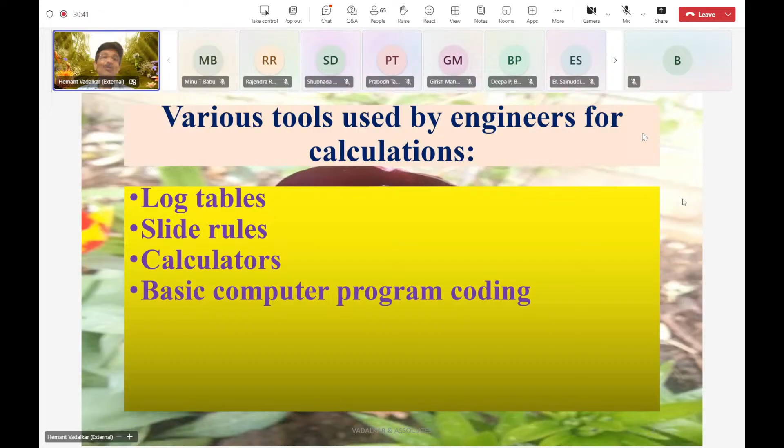So nowadays we got better tools for our computing facilities. Earlier it was very crude facilities that were available, so we used to do some basic calculations by slide rules or by log tables even.

We're getting stuck, one minute. Let me just see.

So there are different programs like spreadsheets nowadays, which are very useful in doing calculations. MATLAB is another good program widely used by engineers. This is again similar to a spreadsheet but much more advanced, with different types of functions available. These are advanced features for doing repetitive calculations.

If you have to do repetitive calculations by changing certain parameters, you just see what is the effect of that parameter, and these are very good tools for that. I would say spreadsheets are still used by many engineers in design offices. That is very handy, very useful and very good for doing repetition.

If you want to try some calculations and the steps are known to you, once you put it into a spreadsheet or a certain algorithm or program, by changing one value you can see the effect of that. For example, if you want to design a retaining wall, you have to take a trial on what base width is required. For stability, for bending moment, for pressure, you calculate at the base of the retaining wall. If I just change that dimension of the base, I can automatically calculate all the overburden pressures, the pressure at the base, and check whether that is within limits or not.

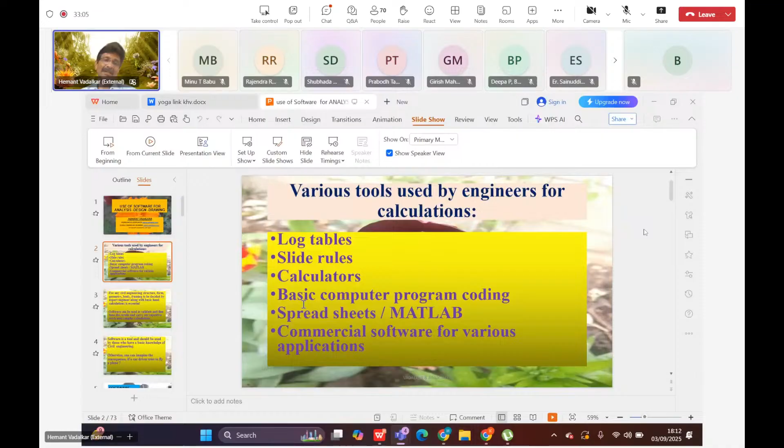Now, generally for civil engineering structures, the geometry is very important. The form of the structure, the shape, is very, very critical. Along with the architect, one has to decide the column positions and the framing arrangement. That is, I think, very critical - the structural engineer has to sit down with the architect and decide the best framing possible for the given type of structure.

So the expertise lies in designing the basic framing. That is most important, because software will only do the analysis later on, but the expert engineer must make a proper framing, since the performance of the structure generally depends on the framing provided - meaning the position of the columns, the beams, the shear walls if required. You also need lift shafts in the structure, and you have to tie this together along with the slab, which generally acts as a diaphragm to transfer horizontal loads in the structure.

So all this arrangement or configuration is to be decided by the structural engineer in consultation with the client and the architects. Then software is used to validate and fine-tune the results, because the engineer has to decide what exactly he wants, the best form of the structure, and how best he can place the columns and shear walls to get maximum efficiency. Now, recently you may have read in the paper that an earthquake happened again in Afghanistan, and there is a lot of damage happening.

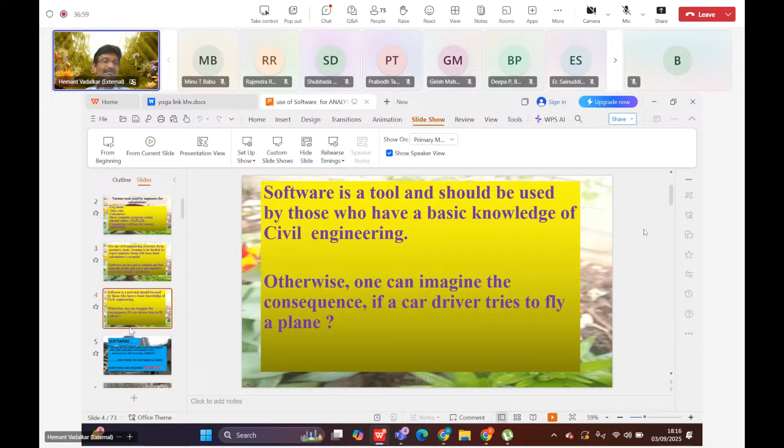Now, what does software mean finally? Why do we need to use it? Otherwise we could use normal tools like calculators to do basic calculations and arrive at results. But nowadays, the size of structures is getting bigger and bigger, and the time available for design and analysis is very less, because everyone is in a hurry and the client wants it fast all the time.

So that's why we need to use the software. The help from software is now a must, because structures are getting very complex and the time available is very less. So in the shortest possible time span, we need to do complex calculations, or take trials - maybe alternative 1 will work better, alternative 2 will be better. Unless we do calculations for both alternatives, compare the member sizes, compare quantities and compare cost...

...we're finally interested in economical design. Design has to be economical, but at the same time it has to be safe and comply with all codal provisions. From that point of view, we have to take a lot of trials with different alternatives and work them out.

Now, if you don't use software, by hand calculation there are limitations because you need a long time for one trial. You have to mark the column positions, apply the load on the structure, do basic stiffness method calculations or moment distributions as learned in college, then arrive at forces on the columns and beams, and size the member based on your judgment and code compliance. Once member sizes are frozen, the reinforcement is calculated.

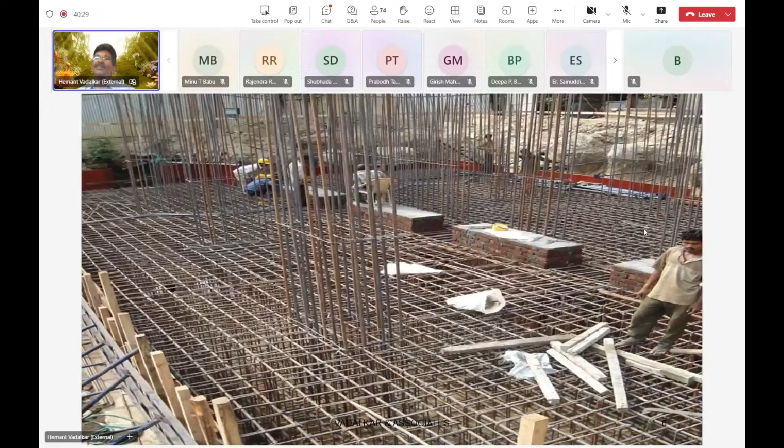Because of the complexity, you have to take the trials. You have to have load combinations - dead load plus live loads, dead load plus wind loads, dead load plus earthquake loads - so many combinations. There are hundreds of load combinations. And for each combination, you have to see that the foundation is complying with the requirement, the codal provisions. The pressure should not exceed the safe bearing capacity.

If it is the raft sitting on the soil, or if it is a pile foundation, you have to design the piles accordingly - the diameter of the pile, the spacing of the pile needs to be worked out. So this is a very, very complex process which needs a lot of time, and of course expertise is required. A lot of experience is required to arrive at a correct, economical solution. So that's why I said, this is what is required most of the times.

Now, for any kind of project, you need detailed documents. What I mean by documents is you have to collect a lot of data from the client, from the architect - what is the intent of the project and what are the project requirements. And then you have to work out the best possible solutions or the alternatives.

The first step will be you have to interact with the client to understand his requirement. Then you have to interact with the architect, who is preparing the drawings which are then sent for approval to the local municipal corporations. You have to comply with the local bylaws, the open space requirements, the height restrictions, and of course the codal provisions. So interaction with the client and the architect is the first step, a very important part.

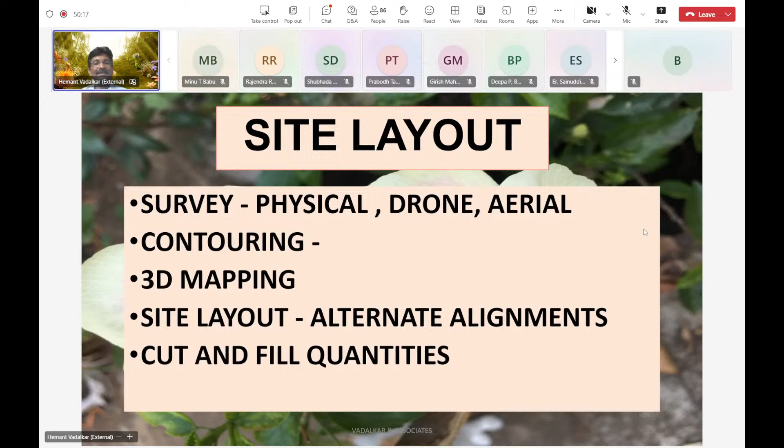If you place certain utilities at certain locations, then you can have some savings. For example, if you want to put a water tank at the highest level on a hillock, then naturally you will get gravity water flow available, so you can save on pumping cost everywhere. Based on the requirement, the layout, and the mapping, you can decide the location of different utilities and different locations of your buildings also.

And as I said, contour mapping is generally used for your cut and fill quantities also—that is very much essential. So there are tools available to do that nowadays.

And then the next step in the workflow will be your geotechnical investigation, because you need to design the foundations for the structure. For design of foundations, the important data required will be your safe bearing capacity, and at what depth I am getting the bearing capacity required for my foundation design.

The type of foundation can also be decided based on the geotechnical investigations. Depending on the type of strata, you can go for normal isolated open foundations, or combined foundations, or mat/raft type foundations. Or if the strata is not good, then in certain cases you may have to go for pile type foundations—a group of piles which will support your columns with the help of a pile cap.

So your geotechnical investigation will tell you what type of strata is there, what type of foundations will be suitable for a particular type of structure, and to what depth you should go for founding the structure. This data is very, very important. So to start with, these are the initial steps for the planning.

Okay, now let us come to the planning and design part—that is the next step. I will just put the list for your reference, what kind of software is available and can be utilized. Okay, so we can just have this.

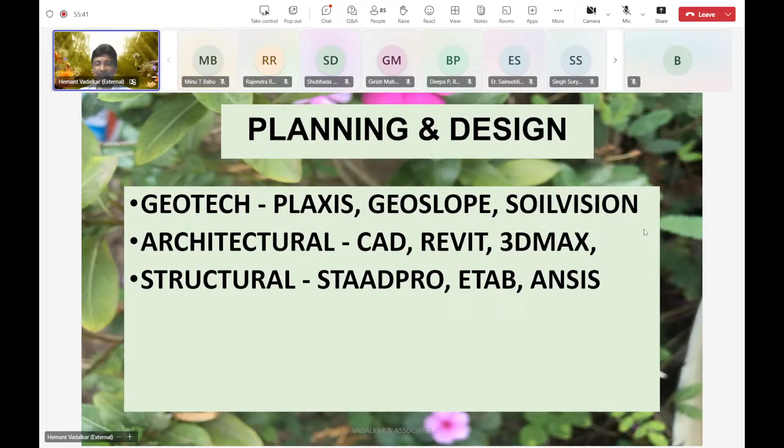Now, once you do this type of analysis using certain tools and software, then you need to generate drawings. For making drawings, there are certain tools again available. For steel structures, Tekla is the most popular package for producing steel structural drawings. It will give you the cut length and quantities of each and every member, along with the total quantity of structural steel, with all the minute details.

If you talk about RCC structural detailing and drawings, then RCDC is another popular package, which was developed by some Indian engineers here in Mumbai first, but now it has been acquired by Bentley. So this is now part of the Bentley software packages.

So the RCDC is capable of producing the drawings after you do the analysis in STAAD or ETABS. It can pick up the data from these packages, and then it will analyze and design on its own. Basically, the results are only picked up, and the design is done by the RCDC module, and then it converts that data into drawings.

So it will produce column drawings, foundation drawings, beam drawings, and slab drawings. All the modules are available in RCDC, which prepares the RCC drawings basically. And then after that, it can calculate the quantities also for concrete and steel, along with the bar bending schedules. So these are the type of software tools available for structural engineers nowadays.

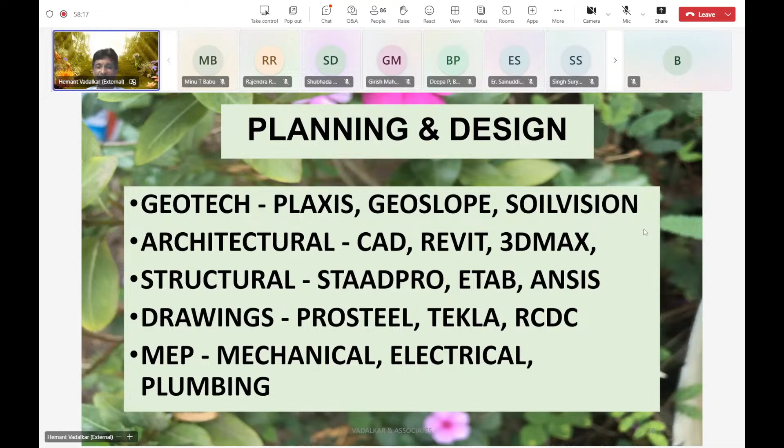Now there are many projects which are handled on 3D models. Slowly, people are shifting from 2D to 3D nowadays.

Once the basic analysis, design and drawings is completed, the next step will be the tenders. One has to get the quantities properly calculated for the tender purpose, and then prepare the final tender, including all the services like architectural and structural parts. MEP services also will be there, and all the detailed BOQ specifications will be provided.

Based on the information, the contractor can quote for the particular project. It can be a lump sum tender if everything is available and the data will be available, or it can be an item rate tender. Both options are possible.

For that purpose, you have to do the rate analysis. There are tools or packages available which can handle the rate analysis part. Once you put the basic material rate, the labor rates, and the indexes, then the rate analysis can be worked out. The specification is very important because all the codes are getting revised after certain intervals, so we need to update our specifications for updating the project.

Otherwise, people are just copying the old tenders and creating new tenders, which is not a good thing, because in the old specifications there are modifications happening due to code revisions, or new materials coming into the market. So our specifications or tenders should reflect those new additions or new materials available at our disposal.

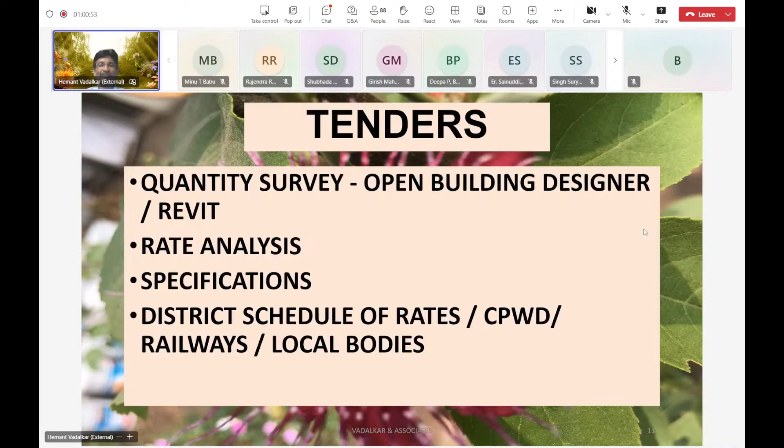We can refer to these standard rates and specifications, and then modify based on your requirement for your particular project or tender. But finally the client, the architect, or the PMC working on a particular project has to work it out based on the project requirements, and accordingly modify the specifications or tender conditions.

The next part is very important - site supervision, which we call project monitoring. Whatever you make in the form of drawings given to the contractor for execution, there has to be someone to monitor whether everything given in the drawing is being followed at the site or not, with the correct specifications followed or not. That someone has to monitor and see that. This is generally done by the project management agency, the PMC, project management consultant.

They can utilize different types of software tools for monitoring the project. Some popular tools are Primavera and MS Project. Generally CPM and PERT charts are created. Advanced software tools are also available nowadays, and tailor-made programs are also available to monitor the projects.

That will give you the cash flow analysis also. The project progress report will be reported to the management at certain intervals, maybe weekly or monthly, generated from these software packages. Then the progress can be monitored - whether the project is going in the right direction, at the right speed, and whether the cash flow is based on the anticipated calculations or not.

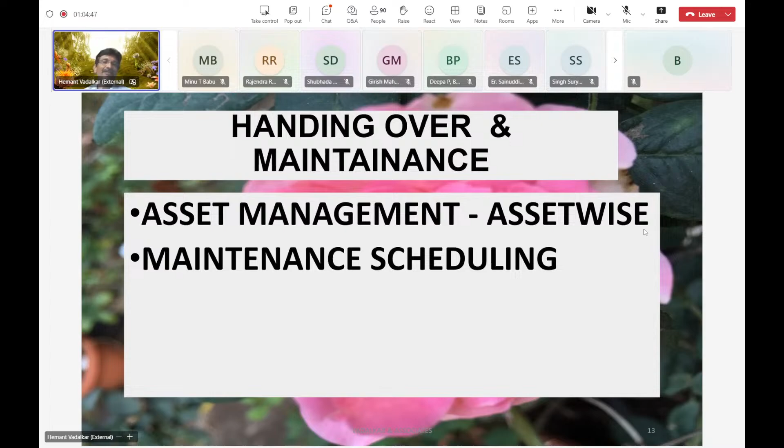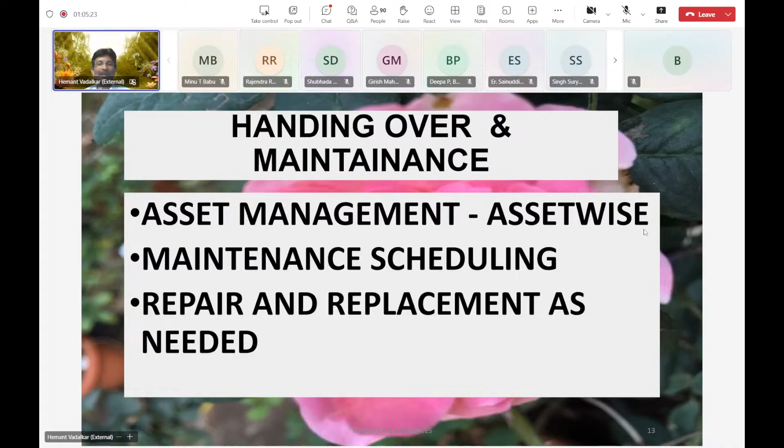At what interval do you need to do routine maintenance? For industrial projects, there is a certain life for particular components like pumps, which need maintenance or overhauling after a certain time, or replacement may be required. In certain parts, repair can be carried out; in other portions, replacement will be needed. After a component's life, say 15 years, you have to replace that component with a new one; you cannot repair it after that. So you have to mark the schedule for your maintenance, which is a most important part.

Spreadsheets are most important and efficient for structural engineers doing repetitive work and calculations. Though we have different types of software packages available, in many design offices engineers are still using spreadsheets. That is very good, because whatever you do by hand calculation can be reflected in the spreadsheet. By just changing one number, you can know the effect if you change one parameter and how it changes your design. I still prefer to use spreadsheets for my basic calculations, which is a most important part.

Now, what software tools are available? I am making a list for reference purposes. There are more software packages available, but whatever is most popular I am listing here for ready reference. For drafting tools, you have AutoCAD or MicroStation. Nowadays you also have ZWCAD, and there are different CAD platforms available used for generating different types of drawings, available at the disposal of engineers.

For finite element analysis or complex structure analysis, you have different tools like ANSYS, Cosmos, Abaqus, and Nastran. These are some names I am putting for information, but there are many more packages available for finite element analysis. Based on your requirement and application area, you can choose the correct tool.

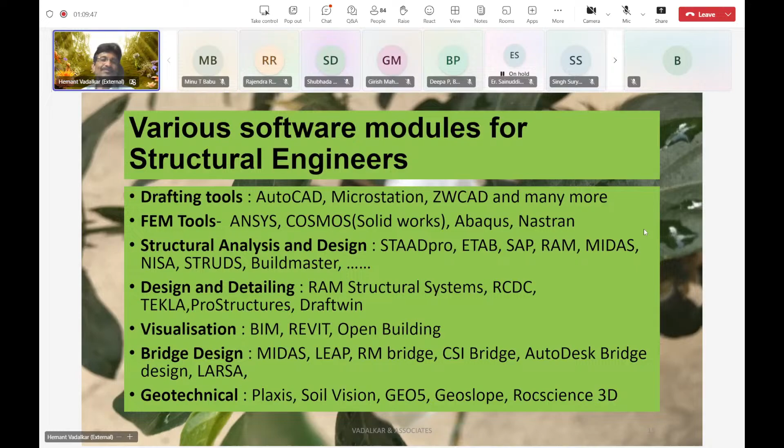Then hydraulics and hydrology - WaterGEMS and SewerGEMS are the packages for doing analysis for your water and sewer networks. Then offshore platforms also need to be analyzed and designed, so there are different packages like SACS or Moses. These are advanced packages available for offshore designs, like offshore platforms or vessels.

But again, I am coming to a simple point: while using any kind of software, detailed understanding of the software is required, along with the functions and limitations of the software, because any one software cannot handle everything. There will be some plus points and some limitations for any particular tool, so the user must understand the limitations as well as the functionality and how to use the functions correctly, because there are a lot of functions available, but if the user is not using them correctly, you may get wrong results. That is a precaution one has to take.

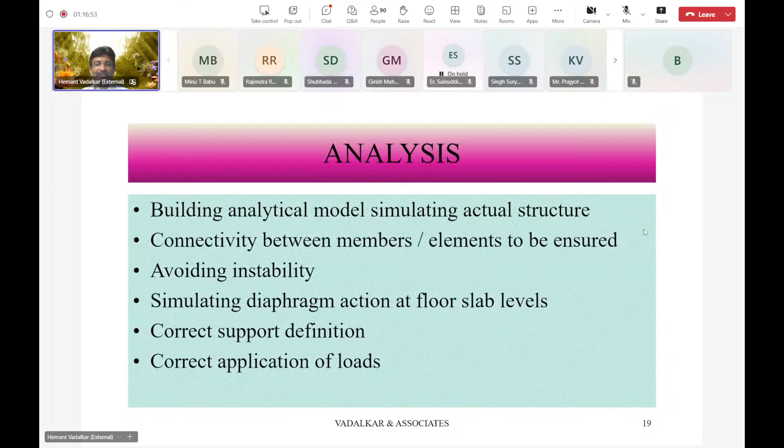The next step is correct application of loads. You have to correctly calculate the load based on code provisions, such as dead loads, live loads on the structure. You may have to calculate wind loads based on IS 875 code, or seismic loads, which is also most important, based on IS 1893 code. So you have to correctly define the loads on the structure, that is the next step.

So what I'm saying is, it is nothing but a mathematical simulation of the real life structure into an analytical model. For generating any 3D frame analysis, the most important part is it is again based on matrix algebra.

So those who have studied structural engineering in detail as an elective subject have studied all this. This is again basically matrix algebra. You have to solve the simultaneous equations and then get the displacements calculated based on the load. So you have the displacement matrix, you have the load matrix.

So you have to just solve this and get the values of your displacement. For the applied load, the stiffness matrix can be built based on the properties. If you calculate the 3D frame analysis, generally there are 6 degrees of freedom at every node in the frame analysis building. This is general purpose. But if you talk about truss analysis, then there is only 1 degree of freedom available - it is only axial force along the truss member, correct? If you are analyzing plane frame analysis, then there are 3 degrees of freedom. So based on the type of structure you model - in general, for the 3D frame, there are 6 degrees of freedom. I'm not going into structural engineering as such, but this is a basic thing I wanted to convey to you.

Now, what is a good model? That is the most important part, because you can make a model which may not be a good model, and then you are not going to get good results out of that. So what is a good model? A good model is the accurate model, which is resembling the actual structure closely - that is what I call a good model. So accuracy of results again depends on the model you build.

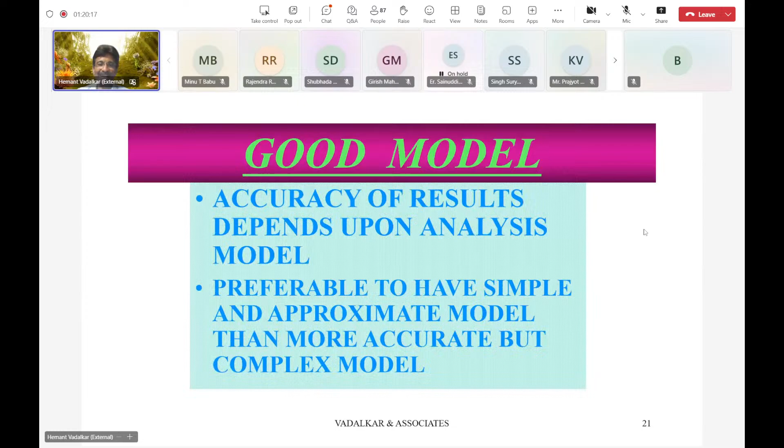Now, what are the steps involved in building a particular model? You have to decide on the structural arrangement first, for beams and columns. Then you prepare the framing plan in consultation with your architects, and then the preliminary member sizes for basic reference, because software cannot just understand what kind of beam size you are looking for. So the engineer has to provide initial member sizes - the beam size, the column size, the shear wall size. To decide the size, you need to have some background, some experience working with this type of structures. Then of course you can change - once you do the analysis, you come to know that this beam is not sufficient because the span is very large and the depth is not sufficient, so I need to increase the depth of my beam. That's fine - so in the next step of iteration, you can change the beam sizes, column sizes.

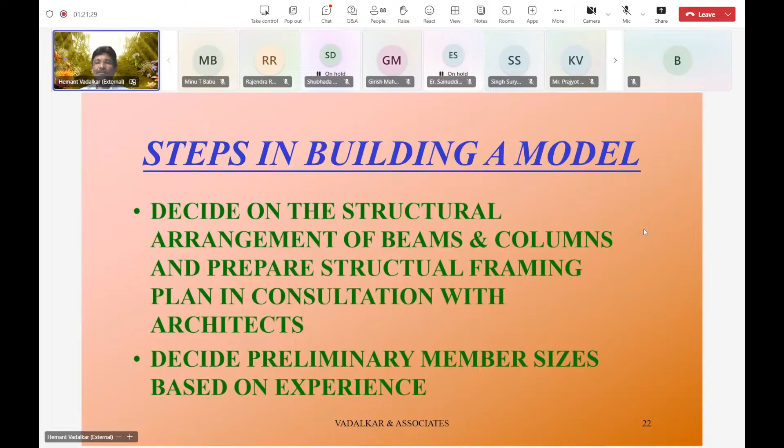You can change the positions of the columns also sometimes based on the project requirement. But to start with, you have to give some initial sizes. Otherwise the program cannot analyze the structure, because it is a matrix analysis and stiffness calculations are required, based on the sizes or property of the member you give or the material properties you provide. So that is the first step.

So this is a general flowchart. I am just showing you how it works. Now this is not only for STAAD. This is general for any kind of software use.

So what structure data do you need to give? Basically, you have to give the geometry of the structure. What kind of units you are providing, that you have to specify. The joints you have to specify, the members you have to specify. Like members, I mean you have to specify beams and columns if you are building a 3D model. And if you are simulating the slab also using finite elements, you have to define the thickness of the element also. Then you have to provide the property of the material you are using.

Then the constants, I call it material constants. Then supports for the structure, whether it is pin supports or fixed supports or any intermediate supports or partially fixed supports. So based on the requirement, you can provide the supports.

Next step will be loadings. There are some primary loads, like dead load, live load, wind load, and seismic loads. After that, based on the code requirements, you have to make the combinations. So those are called load combinations. For limit state design, for working stress design, there are different combinations, or for serviceability. So we have different combinations that you have to make.

Then once you make this, you have to analyze the structure for the given type of geometry and the loading you provide. Once the analysis is done without any error, you go for the output, or study the results, which will give you the support reaction and the member forces. Now those forces will be utilized for your design.

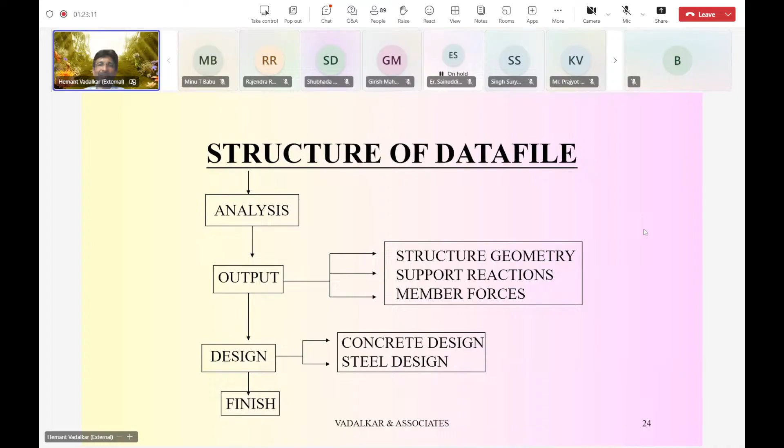So this is again part of structural engineering. I am not going into details, but just a word of caution. Any kind of software you use, you have to just follow certain guidelines for meshing the structure into finite elements.

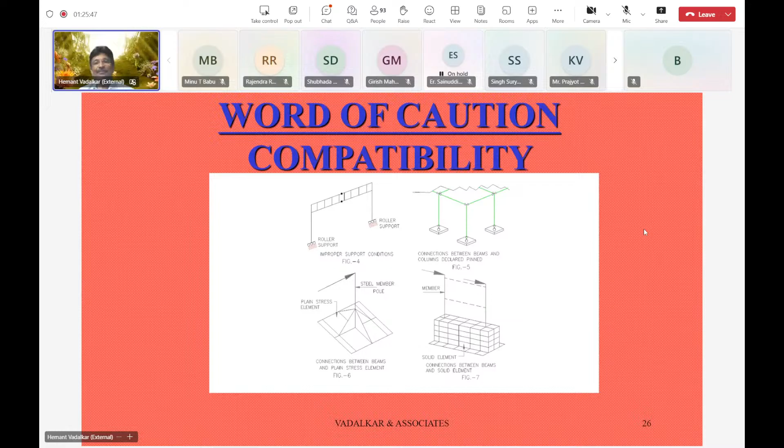So for that, you have to provide proper supports. One of the supports should be a pin support to make the structure stable. These are the precautions you have to take while doing the model and the analysis. Next step is you have to define the supports correctly. As I said, it can be a fixed support, a pin support, or a spring support. For the building, you have to depend on what type of foundations you are using.

If the structure is sitting on very soft soil, and if you are having isolated simple foundations, then the condition of the support is more or less like a pin support, because very large rotation is possible at the support. That means it is a pin type of support. Rotation is allowed. But if you have very solid rock type of strata, and if you are putting the foundation on top of that, it is not going to rotate. So this is approaching the fixed type of condition.

But as I said, in real life, the structure is never like a pin or fixed support. It is in between pin and fixed. So the stiffness plays the more important role.

As far as raft foundations, if you are modeling, then you have to use spring supports, because a raft cannot be defined with pin or fixed supports. Soil cannot give fixity to the raft. So it is just floating on the soil.

And the springs are also compression-only springs, because if there is tension coming on the raft, or there is a pull, there will be detachment of the foundation from the soil. So it cannot handle tension. Always it is under compression. So that's how you have to model the raft with compression springs only. Then you get the correct results. Otherwise, you will not get the correct results. That is again the most important part one has to understand while doing analysis in this type of software tools.

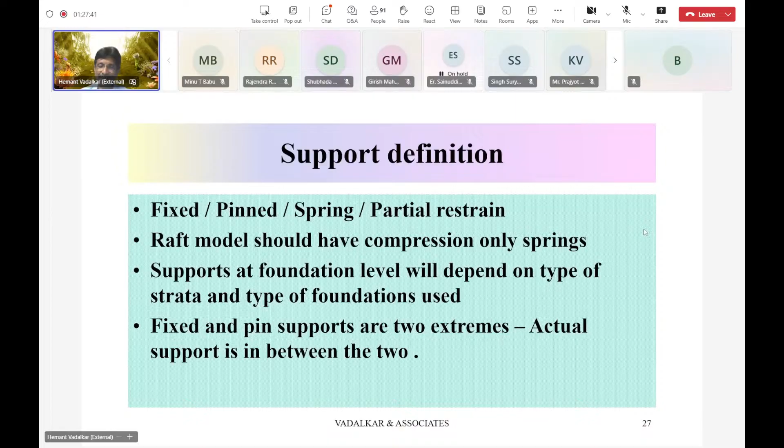This is an example. Suppose you want to analyze a simple truss. And on the left hand side, if you just put both supports as pin supports, then you are not going to get correct results because you are restraining this displacement here, which is not a true situation at site.

So what is the correct situation? If you want to analyze a truss like this, one support can be pin, the other must be roller, so that you allow displacement over here. When you apply load here, there has to be a lateral displacement at the joint. So we have to allow that by using a roller support over here. I cannot make both ends as pin.

In the real life structure, what happens? The truss is actually sitting on a frame. So there is a partial restraint to the moment here. It is not restraining the moment fully, but there is partial restraint because of the stiffness of the column or the frame. So it is neither roller nor pin, but having partial restraint over here.

So if you really want to see the behavior, you have to model the entire frame first, then model the truss on top of this, and then put the loads over here. So this is in between your pin and roller support. That's the actual situation. So it depends, but if you want conservative results, always have one pin and one roller. That will give conservative results for the truss analysis.

So these are, I think, some small points one has to remember while doing the analysis of structures. Otherwise, you will not get the correct results.

Now I will just touch upon certain part of the instability because in certain packages you get some warning messages like instability. You cannot ignore those messages. Now, what is the reason for instability? I'm just trying to explain you.

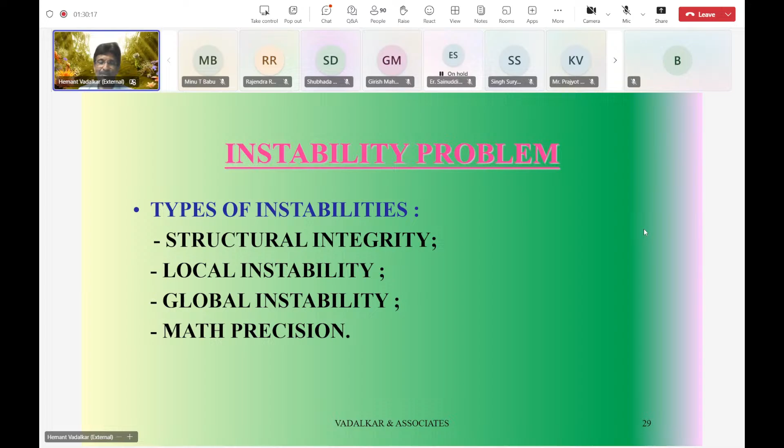Or there is a math precision problem sometimes, because it is again a stiffness calculation done in the program. So if the member length approaches 0, what happens? Your denominator becomes 0, means the term becomes infinity in the matrix analysis. That is called the ill conditioning of the matrix. If any member is very, very flexible or the length is 0, that means the stiffness is infinity. Both cases will give the math precision problem, or in matrix terms, an ill conditioning of the matrices. So we cannot analyze this type of structure. You have to be very careful in dealing with these issues.

Another instability problem will be improper support conditions. If you define them wrong, it can cause instability. Or if you make excessive releases of the moments in the members or the joints, then also it can cause instability. If you declare all as pin members in the structure, it will become a pin type of joints, and it can form a mechanism also. It cannot be a stable structure.

Like a portal frame I am trying to analyze. If I make all the joints as pin joints of the portal frame, then it cannot stand, it will just collapse. So that is what instability means. So how do you understand the instability? It will result in large deformations under the loads. That is the indication of instability. So you have to just avoid these things.

If you connect a very stiff member to a very flexible member, then again there will be instability because there is ill conditioning of the matrix, one very small value, one very large value. That is not acceptable. Or declaring the plates as plane stress element while bending is also counted. Like if I am designing a slab and I define the finite element as a plane stress element, it is wrong because it cannot handle the bending moments. Plane stress element can only handle the stress in the plane of the element, not out of plane.

So these are the small things which will lead to instability problems. That's why I'm highlighting this. The consequence of instability is what? Load is getting lost. So if I apply 100-ton load, the reaction I am not getting 100 tons. If the reaction is less than 100 tons, you should understand that there is some problem in the structure, there is instability. The load static check is not performed correctly, meaning the load applied is not equal to the reaction. That is the instability in the structure.

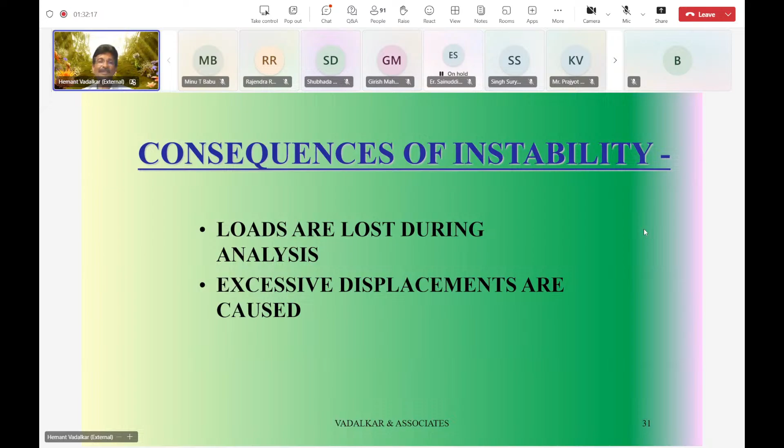So, or if you look at displacement diagrams, you can see large displacement, excessive displacement, that is another indication of instability. You have to be very careful in understanding this. One more important part I would like to highlight: the diaphragm action of the slab is very, very important. If you just analyze the bare frame, it will not give the correct results. So what you have to do is declare the slab as a diaphragm in the structure, then only you get a correct result.

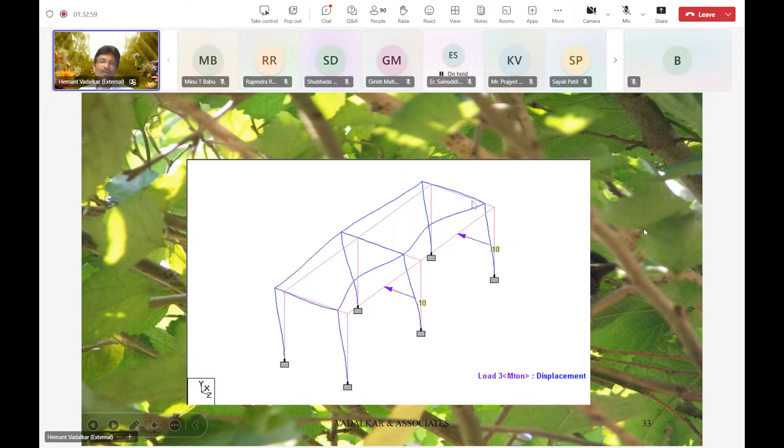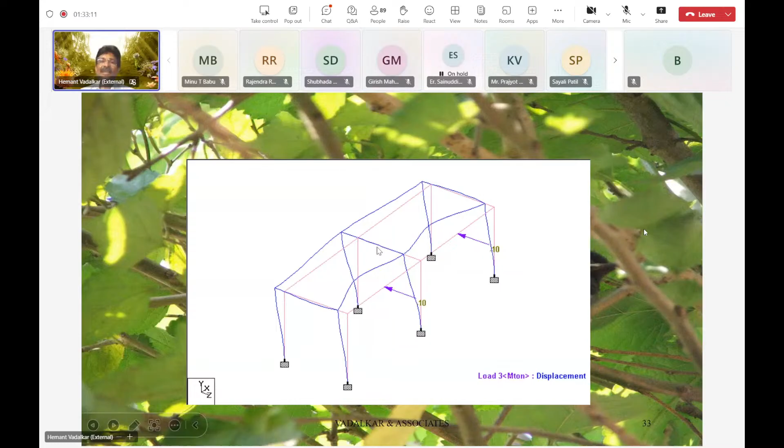This is an example. If I analyze a bare frame without any diaphragms or slabs, and apply horizontal loads on the structure, you can see the displacement here. The central frame is carrying more load, correct? So displacement is more here, displacement is very less there. The same thing happens for the shear also, or the load sharing. If I assume all the columns are equal in size, they must carry equal load, but that is not happening if I don't model the slab diaphragm action here. So this is not the correct result I'm getting. You have to remember, you have to simulate diaphragm action.

If I do that, what happens? This is without diaphragm action. If I don't model diaphragm action, then this is the result: the central frame is taking almost 50% load, and end frames are taking only 25% load. But I expect all the frames to carry equal load because all are same size. That is not happening because I am not modeling the diaphragm here. But if I model diaphragm in the next model, then see what happens. So this is the diaphragm action.

Displacements are equal now at all the nodes. If I put horizontal loads, the frame is equally displacing at all the points. The shears are also equal now, 10, 10, 10. So that means the contribution of each frame is 33%. This is the exact result I expect.

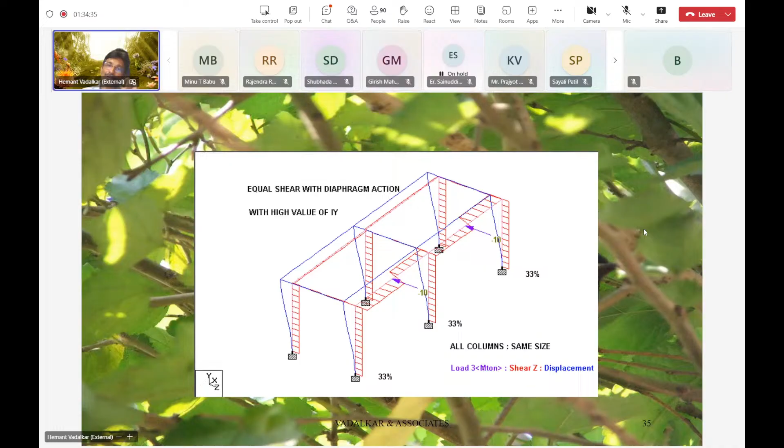So always remember, in 3D analysis, you have to check in the model whether you are accounting for diaphragm action or not. That is most important to correctly distribute the lateral load in the structure. This is the way you get a correct load distribution for seismic or wind loads if you model the diaphragm action. Using any software, if you don't know how to simulate this action, you are not going to get correct results. Software is just a tool. You have to use it correctly with full understanding of the structural behavior.

Same thing happens with shear walls modeled with finite elements. People are very much fascinated to use finite elements for modeling shear walls. But again, compatibility is very important. Connectivity of the frame and the finite element is very critical. If you don't understand it correctly, you are not going to get correct results. I will illustrate that with a small example. Compatibility between different elements is also critical. A plane stress element in plate elements cannot be directly connected with the beam element at a single node. Let me show you what happens if I do this.

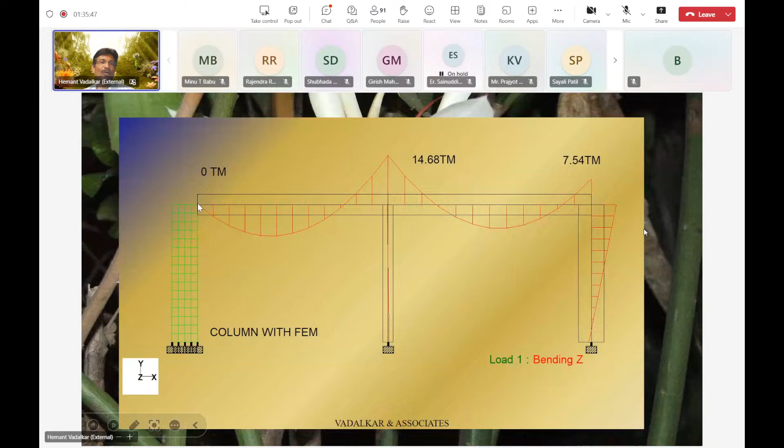I think it is not very clear, but you can understand the left side is a finite element shear wall model, and here is the frame with beams and columns. I'm applying a vertical uniform load. Look at the bending moment diagram now. Where the beam is connected to the shear wall at a single point, your bending moment becomes zero, which is not correct because the beam is actually rigidly connected with the shear wall. If I simply connect the beam member to the finite element node at one location, this is what happens. I expect some negative moment over here in my frame, at these columns. But with the shear wall connection, I am not getting that.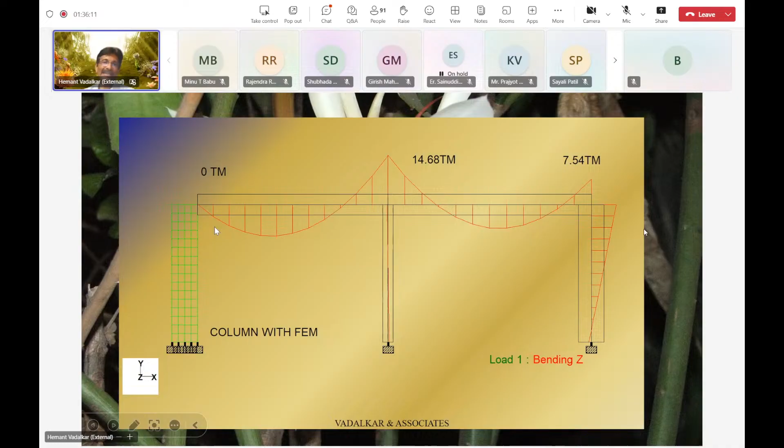So this is not a correct model. What should I do? To make it correct, I have to extend my beam inside the shear wall. That is the requirement, so that continuity is established inside. If I make the model correct, now this is the result I get. I extend the beam inside the shear wall and connect to these internal nodes. Now I am getting some bending moment over here.

So you have to be very careful using frame elements along with finite elements, if you want to mix finite elements with your frame elements. Continuity is very important. You have to establish good connectivity between the frame and the finite elements. Only then are you getting correct results. Otherwise, you will get different results. That's why I'm illustrating this.

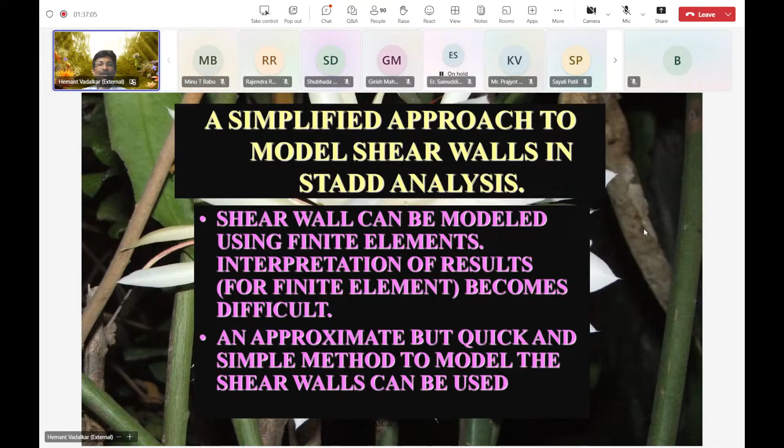So a simplified approach we are suggesting in STAAD analysis is, when you want to model a shear wall, don't go for finite elements. Use a simple column and beam concept. The shear wall can be modeled without finite elements, done in a schematic way that I'm showing you in a picture. If this is a building, and it's a shear wall I have to model, what I'm doing is splitting the wall into 3 segments.

Each segment I'm treating as a vertical column. The connectivity is just connecting it vertically. These two arms are called rigid arms, which I connect as the rigid element in the frame model. Without going to finite elements, even with this basic beam and column framing, I get correct results. That is what I'm trying to illustrate.

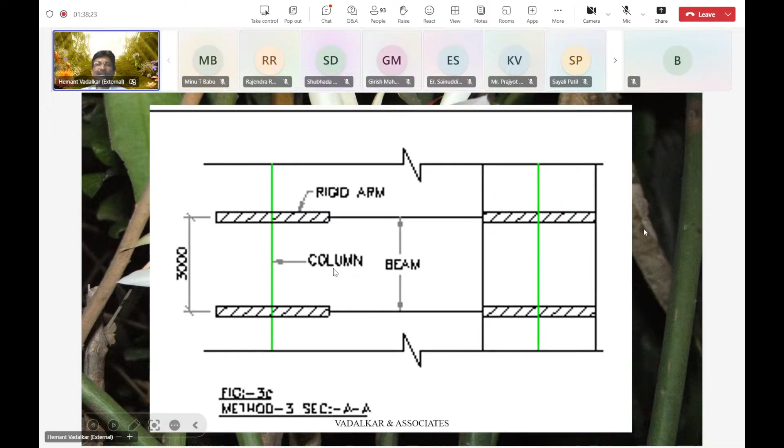So what I mean is my shear wall, I declare as a column, a wide column, connecting it vertically from node to node. Inside the body of the shear wall, this part I call a rigid arm, which has high stiffness, like a floor beam depth I am modeling there. This is a normal beam, but with floor depth property, so it becomes a rigid beam. This is a very simple model which gives me correct forces in the shear wall and frame interaction. So rather than going for finite elements, these are the simplified approaches we can use in model generation.

This is the schematic view again, same thing. This is a shear wall. This is the model at this point only. This part is called a rigid arm, connected by a deep beam here, and this is a normal beam I am connecting in the frame. So if I do this, I get fairly good results.

So this is the approximate model. This is not an exact model like finite elements, right? But still, I am getting very good results, very accurate results, with some error, of course, maybe 2 to 5% error will be there, but that I accept rather than making a very complex model with finite elements.

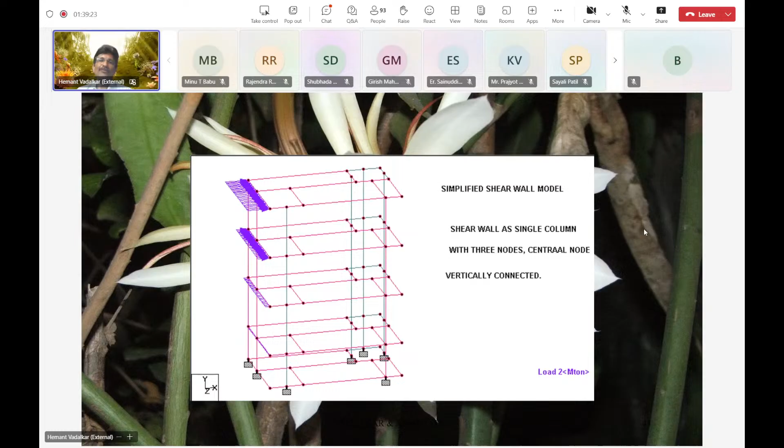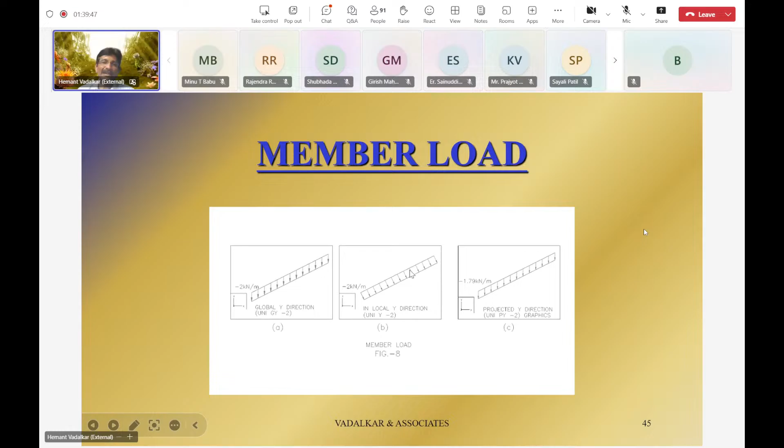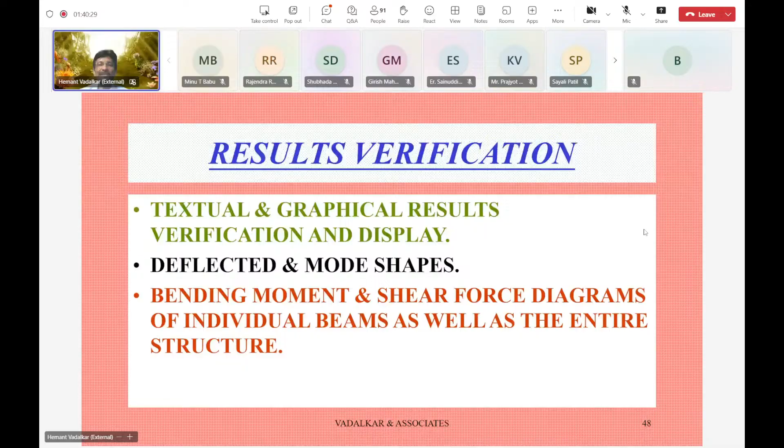Now, once you get the analysis done, result verification is very, very important. You have to verify the results graphically and logically. Look at the deflected shapes, look at the bending moment diagrams, and then confirm the behavior, whether it is the way you like it or the expected behavior is reflected in the results or not. The deflected shape will tell you whether it is behaving correctly or not. So you always have to see the deflected shape first, then the bending moment diagrams. If you are using finite elements, you also have to look at the stress contours. I will just show you some pictures for that.

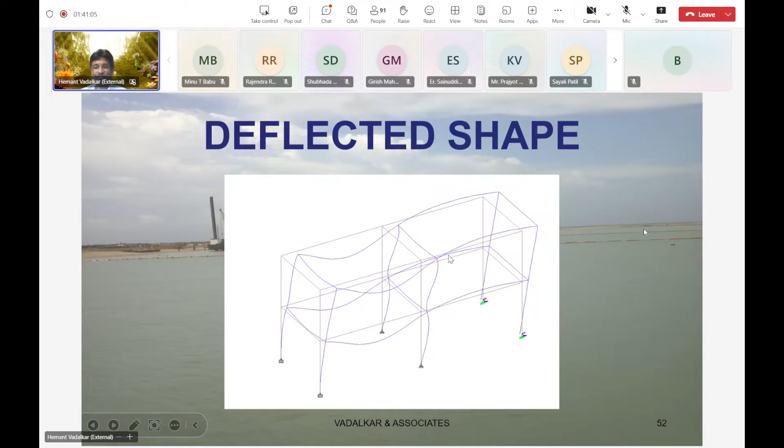So these are the different types of results you can see, like a deflected shape for the structure, whether the structure is deflecting based on the load you apply. If the loads are applied in this direction, you get deflection in the proportionate direction, of course. Same way, you can look at the bending moment diagrams for the entire structure, or for a particular floor. So there are hogging and sagging moments, and you can see the value as well, and get yourself acquainted with this.

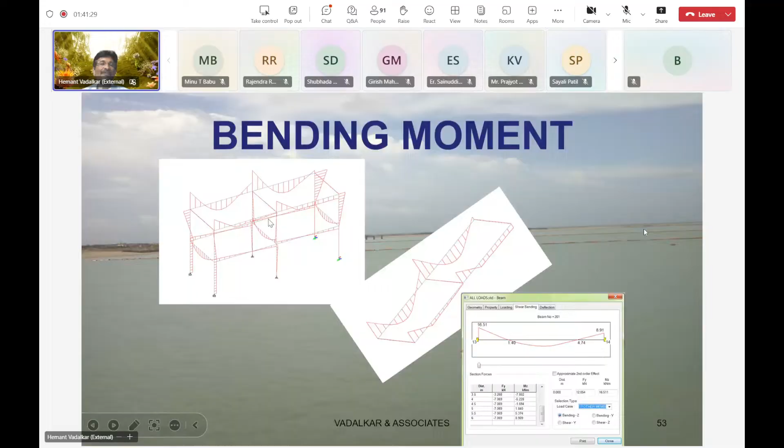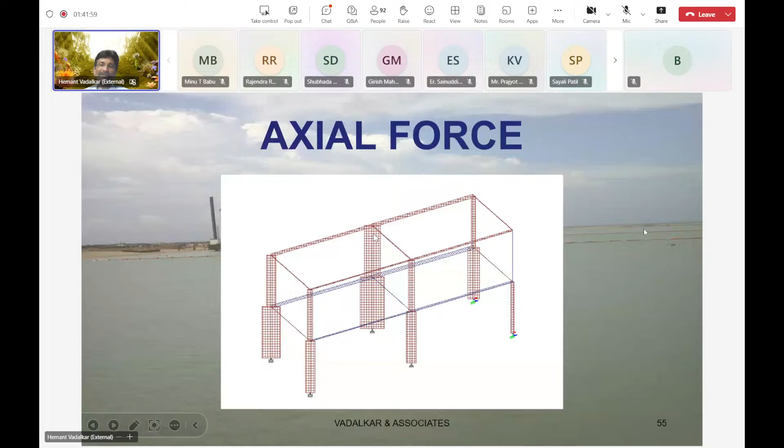Unless you get confirmation on this, you should not proceed with the design. So just cross-check these values. Same way you get the shear force diagrams, for different load cases and combinations, for my envelopes also. And the axial force diagram - this is a very important diagram that will tell you the direction of force, how the force is flowing from the structure to the foundations. So if I apply load at this level, it goes to the beams, then goes to the column, and then goes down to the foundation. The load, the axial force, has to increase as you go down towards the foundation. These are very, very important diagrams one has to look at.

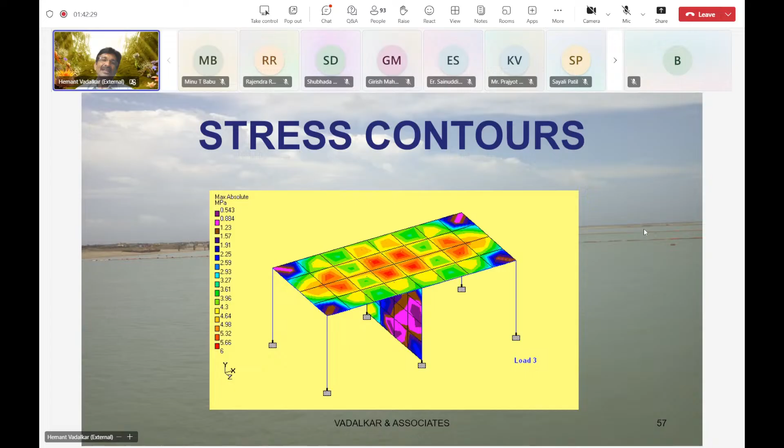And then if you're doing dynamic analysis, of course, you get a mode shape diagram also in the output. If I'm using finite elements in my model, then you get a stress contour diagram, something like this. So I'm getting stress contours for finite elements. But as I said, result interpretation becomes difficult sometimes for those who haven't learned this technique of finite elements.

So sometimes it is very difficult to understand the results from the finite elements unless you are able to interpret it correctly. So again, use it with caution.

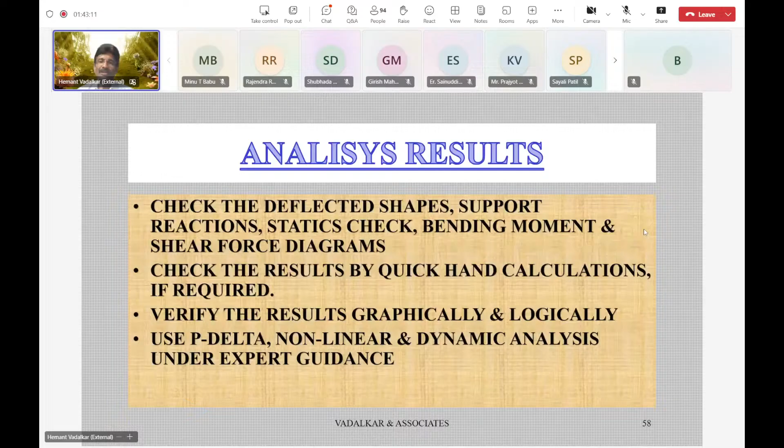This is again the same summary I am just putting up. So you always cross-check the deflected shape, check the support reactions, check the stress contours, graphically check the bending moment diagrams and so on.

There has to be some consistency in the assumptions of your analysis and design. Sometimes people neglect torsion in the beam design, but that should then be released in the analysis also. Otherwise, there is no consistency.

Now, the problem is the connection design in steel structures. If you release the bending moments, this becomes a simple connection. So you have to release that in the analysis as well, and the same you have to carry forward into design. Otherwise, if you analyze as a rigid structure and then release it at the later design stage, that is not good, that is not correct.

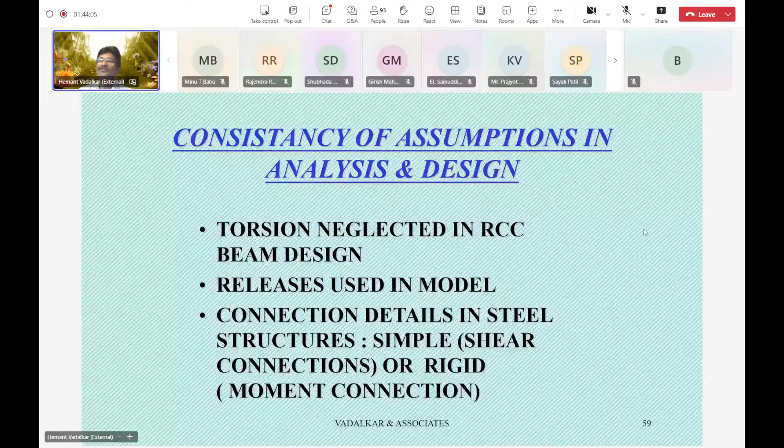So that's why I'm saying you have to have consistency in the assumptions, in the analysis, design, and the detailing, all these steps. So if you want to make a simple connection in the steel structures, you have to release the moment in the beginning, in the analysis also.

Once you do the analysis, then go for design. Define the correct parameters in the design, like grade of concrete, grade of steel you are going to use, and default parameters in the software you have to study carefully. Then define correct parameters, like what is the minimum cover you have to provide, what is the grade of concrete, whether M35 or M40, whatever it is.

Then in the column design also you have to specify the bar arrangements, how you are going to place the arrangement of the bars in the columns. Based on that, your design will differ.

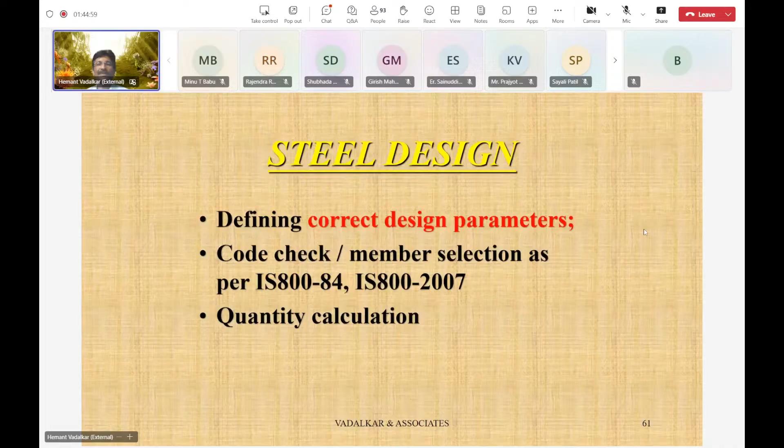In the steel design, again, correct design parameters like your slenderness ratios are important, so that will affect your design. And then your deflection check is also important, how much deflection you allow in the structure, that you have to specify. Based on these parameters, the steel design will be performed by the program.

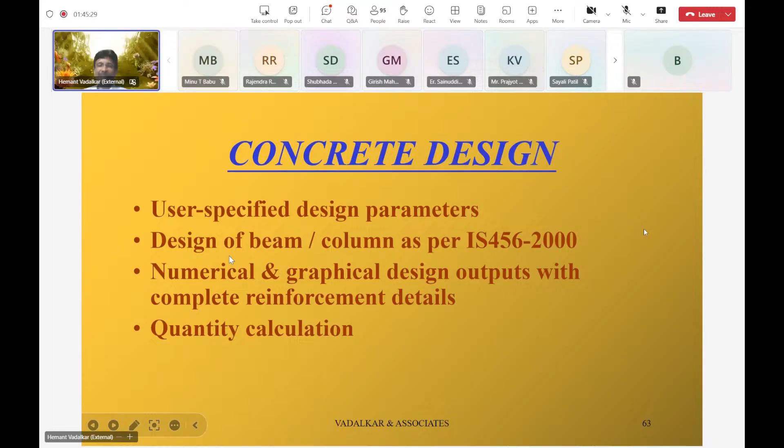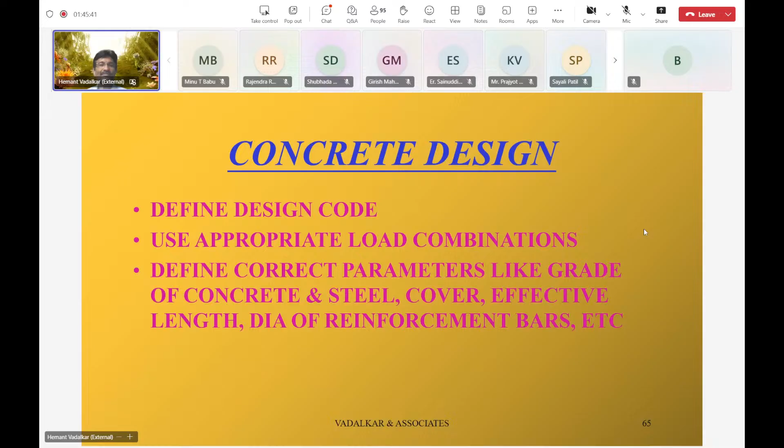These are the sample outputs, but this is not the real drafting. Drafting is done by another package, that also I will try to show you.

So you have to be very careful in modeling the shear walls, diaphragm action of the slab, spring supports. Those are very important; without that, you will not get the correct results.

Now, once the data is ready, you have the analysis done, you have the design also ready, finally you have to draft it now. So the drafting tool picks up the data from the analysis packages and generates a drawing for you.

So some tools pick up the data directly from ETABS and STAAD, and the defaults also must be understood very clearly. You have to define the correct parameters if different from the default value. As I said, user intervention for the correct detail is very important; you cannot just rely 100% on the software. It will go by default numbers and generate drawings for you.

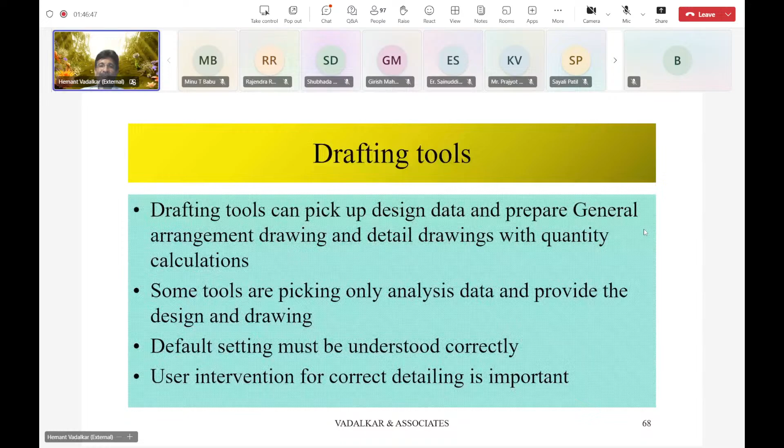But you have to intervene and tell the software that, okay, no, I don't want it this way, but I want it that way. So there are certain parameters you have to define, and based on that, the software tool will generate the drawing for you.

And once you do this, you can of course make a bar bending schedule also out of that. How many bars are required, how much length is required, what is shape of the bar, and what is the quantity for each diameter of the bar. So that can be worked out by this detailing software.

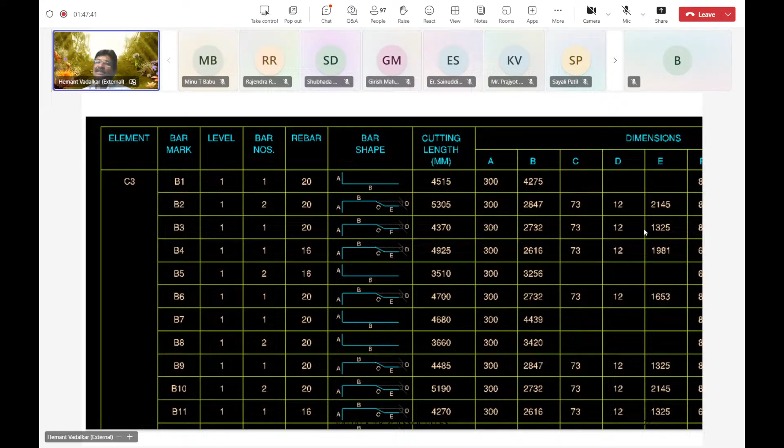So first is the analysis software, then the design software, and third is the drafting software. So all the software tools are available nowadays. So engineers must use it very carefully and cautiously, as I said.

And the last part will always be very important: the results are to be cross-checked with basic hand calculations. So I will again just say again and again, don't rely 100% on any software. You do your hand calculations and cross-check the results randomly for certain members, and then only accept the results. So I think your judgment is more important than the software output. That is what my understanding about this subject is.

Thank you very much for the time and patient hearing.

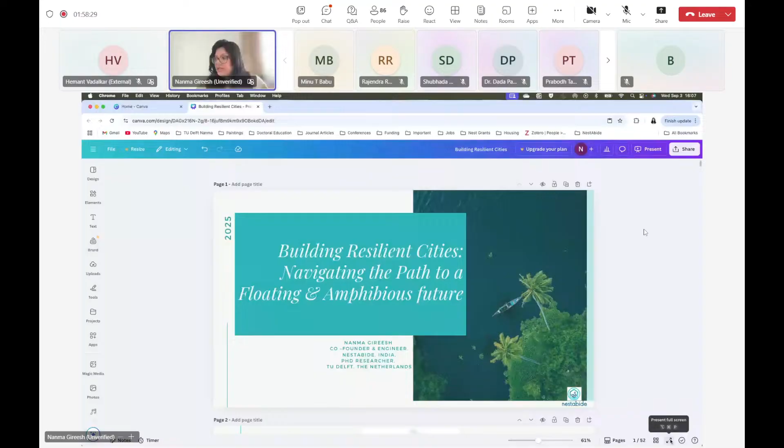Please let me know if it works. Yes ma'am, it's visible.

Thank you. Yes, so I am Nanma Gireesh. I'll just start from who I am. I'm a person from Kerala, a single child for wonderful parents in Kerala, and they named me Nanma, which means goodness in Malayalam. So I try to be good, but I'm not sure how much of that is successful. But that's me. And I am basically a civil engineer. I did my bachelor's in civil engineering and master's in translational engineering, which is an interdisciplinary course where we try to connect or translate technology into society.

And that is where basically I learned about amphibious houses and floating future, so I'll just dive into that. This will be the story about how I navigated the path to a floating and amphibious future. Basically, I'm still working on it. I wouldn't say that I've reached somewhere, but I am trying my level best with a wonderful team, which I'll also show.

So this is where I'm from, Kerala. As you may already know, it's surrounded by beaches, backwaters, rivers, and canals. We have about 44 rivers in Kerala. It's a blue and green paradise, and it's amazing to be there. But it also comes with its own issues - high rainfall issues happen almost every year, and that leads to floods. As you may have already heard about the 2018 floods, it was one of the devastating floods in Kerala. At that time, I was already working on amphibious housing.

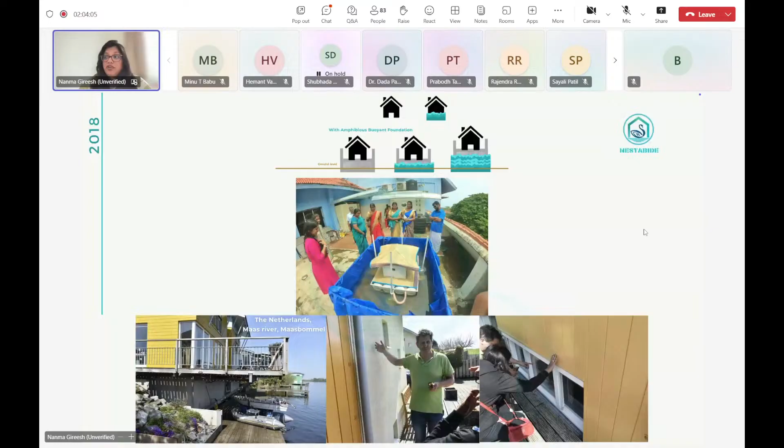It was one of the devastating floods, and that pushed us to think, understand and research more about amphibious houses as a potential solution, not just for a particular place, but for Kerala itself, or in general. So yes, this happened in 2018.

From there, we founded Nestabide, which is my startup, along with my best friend Ben K. George. He's an electrical engineer and I'm a civil engineer. We studied together in our masters for translational engineering, and that's when we also visited Maasbommel.

So this is an amphibious building. An amphibious building is a structure that normally stays on land and only floats when the floodwater comes in. One of the main things I always connect to amphibious buildings is that you may already have seen some floating buildings around the world, or at least some pictures.

So floating buildings are permanently floating on water. Buildings that are permanently floating on water are called floating buildings.

And amphibious buildings are always on land. So you do not have to change your lifestyle. You can live peacefully when it's dry and when it's summer, or when there's no flood waters or high water or anything. But it will definitely float when the flood water comes in.

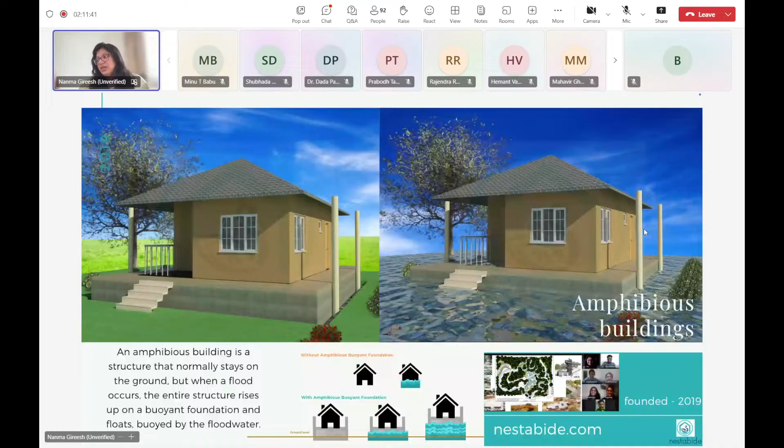So this is a small working model, showing how the water comes in and fills the wet dock.

This has a wet dock, so then it floats, and then it comes back to its original position when the water recedes. So basically, your life savings, your belongings, everything is safe in that house. You can continue living in that house even during a flooding if it's not too much. But if you're not feeling quite comfortable, then you can also leave. But you're safe. Your house and belongings, everything will be safe.

And I'm not saying this will work everywhere. Amphibious houses, riverine floods, different types of floods and different types of places are there, and it only works where the flood impact, the water current, the level of flood water, everything needs to be studied before we actually design this. So it's not a building that we can just replicate from one place to another, but it needs to be studied. It needs a thorough investigation of the site factors, the soil, water, even the quality of the soil, water quality, everything, before we actually design and implement an amphibious house.

So basically, thereafter in 2019, continuing my story, I went to this conference called International Conference on Amphibious Architecture, Design and Engineering. It was in Warsaw, Poland, and it was the first ever time that I left India on my own. But that was an amazing experience.

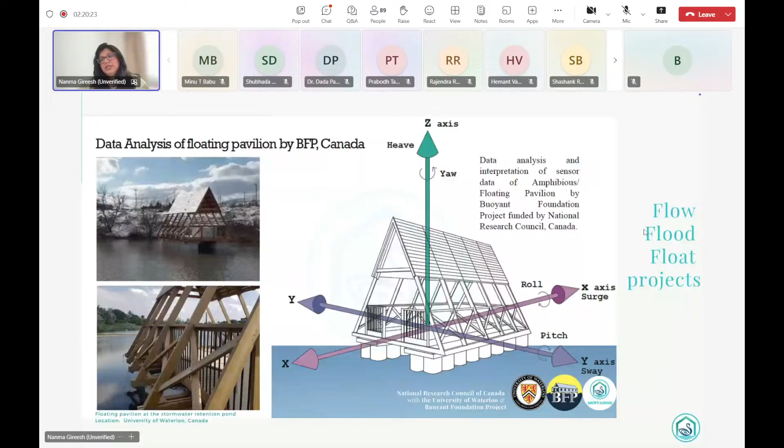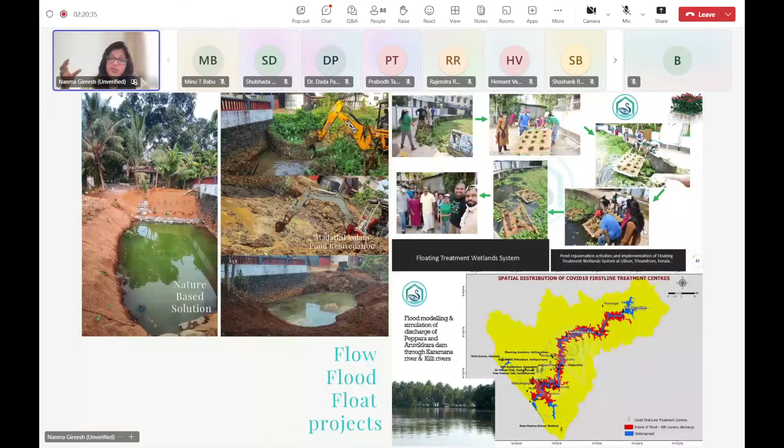During that time period, we also did some other work on nature-based solutions, how we can try to bring back the wetlands that can aid flood projects and all those things.

Coming back to 2021, after a year of doing some other projects, we came back to amphibious. At the same time, we were all trying to explain how an amphibious building works. It was very, very hard to explain, obviously. And that's when we thought we'll do it on our own.

So Ben and I, we both took out our savings and built this amphibious prototype, which is India's first amphibious prototype. Basically, it is a concrete buoyant foundation inside a wet dock, with a pavilion structure on top, just to show that concrete floats and how the buoyant foundation works.

You can even now come to Kerala, Kuravilangad. It is basically in my father's front yard. We couldn't find any other place, so we took a small piece of land and converted it into a kind of wet dock where we could put an amphibious buoyant foundation inside, with the pavilion structure on top, and that came to be India's first amphibious pavilion structure.

So you can see here, it's not very aesthetically done or anything. Basically, we just wanted to show how the system works. Nobody believed it, even during construction it was very hard to convince our construction workers that this will work, basically Archimedes' principle, but it is still a bit doubtful whether this will work or not.

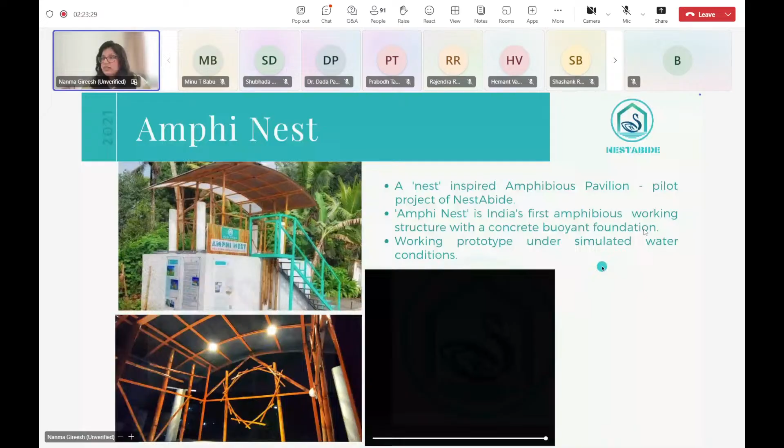So this is basically a working prototype, as you can see here. This is the buoyant foundation, the inside concrete box. You can actually get inside this buoyant foundation. There is a step, and we put a ladder basically, so we can go inside the buoyant foundation and see what's happening inside. It's basically 100 square feet of pavilion floor. That is only what we could afford, that's why.

100 square feet of pavilion floor area means you're getting another 100 square feet inside the buoyant foundation. So if you're designing for a 900 square feet house, you can also get an additional 900 square feet inside the buoyant foundation. That's how it can be designed.

This is for a capacity of 10 persons at a time. And the buoyant foundation was about 9 tons. We basically underestimated, thinking we only need 1 crane to hold the buoyant foundation and put it inside the wet dock, but we actually needed 2. You'll see that in the video.

It was about 9 tons, but there was not a good direction for how to put it inside. So that's why there were 2 cranes from 2 sides holding the buoyant foundation up and then putting it inside. You can see here it's about 20 centimeter thick concrete foundation with steel reinforcement. I also added a bit of wire mesh inside.

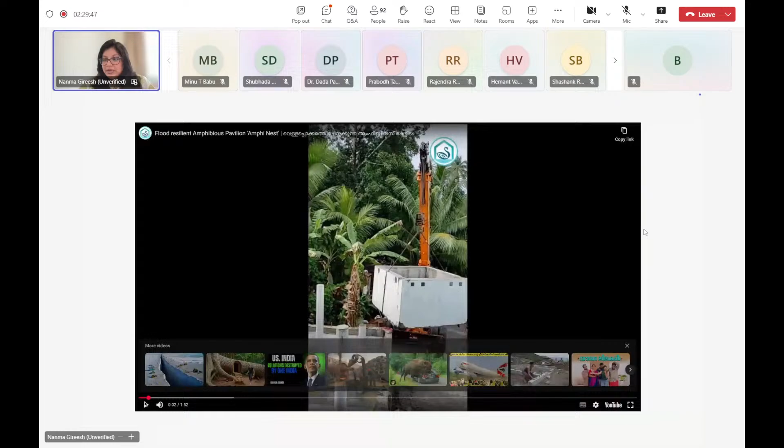So you can see a bit of construction here. As you can see, that is the buoyant foundation. You can see the four guidance posts, and that is the wet dock. There's another crane supporting from this side, and that's how we put the buoyant foundation inside, and that is just the roof and the structure for the pavilions.

Here you can see, for one second, this is the floor level. Please concentrate on this edge, and you can also see the water level. This is a fast-forwarded video, basically because it behaves like a ship, not like a boat. When it's a small boat, you can see it swaying and everything based on small weight distribution. This one behaves like a ship — you can barely see the movement, and you might not even recognize if it's afloat.

One of the basic things we also learned in Maasbommel was during one of the worst floods on the Maas River in the Netherlands. They were sleeping during the flood, and the house floated on its own — they woke up to find they'd slept through a flood with high water levels. They had experience before, but it was still good to know that it works, and it works automatically. You don't even see it happening.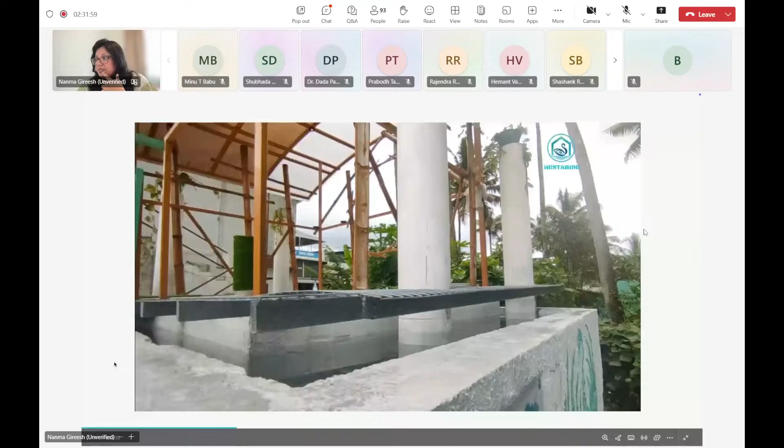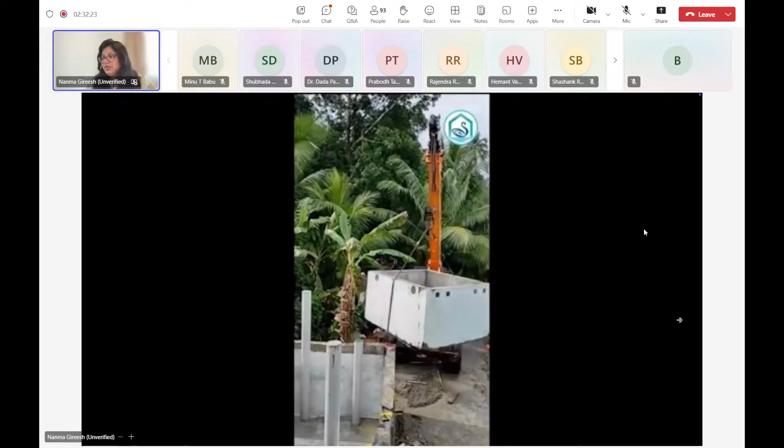You can see the floor level and water level — please focus on this side, on the floor level side. You can see how this is a fast-forwarded video. That's how it works; the rest is just the inner core. This video is on YouTube, same video — that's how an amphibious system works. It will float when the flood water comes in, and it goes back to the original position when the water recedes. That is it.

From there on, we proved the theory that it will float — concrete will float — and the buoyant foundation, as it is, we tried to prove that the structure itself will work. If anyone has doubts, they are all welcome to see it. That's how we tried to initiate this project and inform people about it.

Honestly, it was such a learning experience for me too, because I had to convince our own construction workers who worked on this project — they didn't even believe what they were doing. It was a nice experience to work with them and teach them. They were also making fun of me, saying, 'Hey, you're wasting your money, why are you doing this?' And then suddenly, this works.

During the first float test, honestly, it didn't float. There was a small gap we had left to put the entire system into place, so we had to close that, and it worked. When it worked, everyone was like, 'Okay, it is floating — now we understand what you are talking about.' So it was good that it wasn't just belief based on theory.

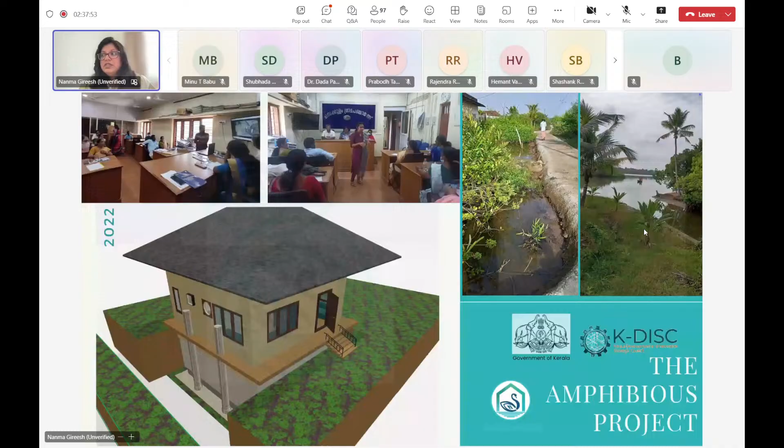One of them is here - their original house is this, and it is almost already gone. The second one is this, in Munroe Island. As you can see, I just want to explain the issue: it's not just subsidence or flooding, there is also high sulfate content in the water or soil. So those things also had to be considered during the design of these houses.

The second one is a proper house, but during the 2018 floods, this house, surrounded by farmland and paddy fields, when the water came in, as you can see, this window was covered until there - about 2 meters of high water. We thought this would be another opportunity to showcase or design an amphibious house for them as well.

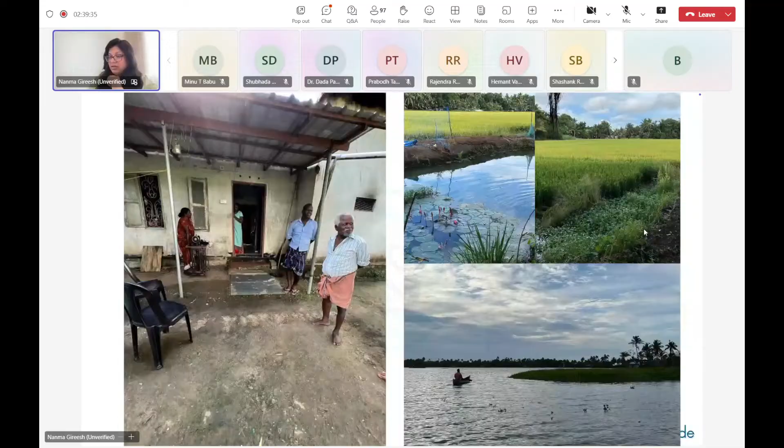For me, these 2 places are also a bit challenging because they are not accessible via road, which increases the transportation cost of materials, men and machinery to the land itself. That was one of the quite challenging things. From the main road access, you have to go via channels, lakes and rivers - that's how we get to the site itself, in Kainakary in Kuttanad.

So it's also a bit challenging - it's not like we can bring in cranes or anything, so it needs another approach. You can also see here, this is the Munroethuruth site, Munroe Island site, where you can see it's a bit inward.

This is the maximum where a boat with construction materials can arrive. These are not very deep channels where we can bring in one load of boat materials and be done with it. But obviously what I see positive here is that there are so many buildings already. How were they constructed? So there are boat loads of material. It's a different sort of calculation where instead of truckloads of material, we are going with boat loads of material. So these are all learnings for me and my team.

As Nestabide, as a startup starting from the beginning, from the first phase, I also wanted to introduce the importance of soil investigation, water investigation, and geotechnical investigation in these projects. So one of the geotechnical investigations we did together with our partner...

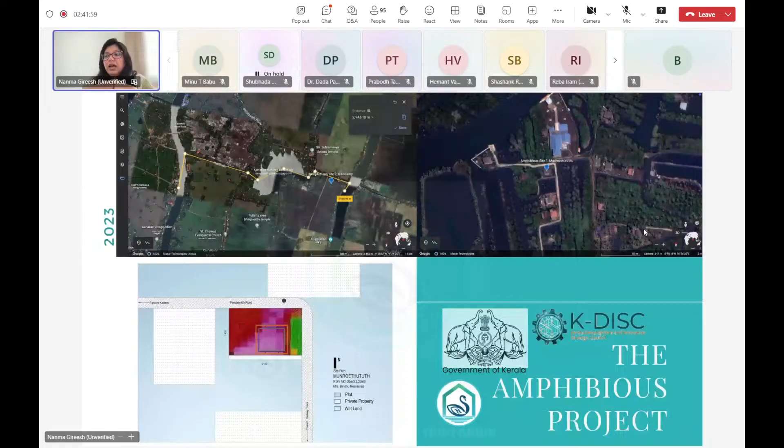So our partner Geotransit, that company, they are doing these projects together with us at all amphibious sites, potential amphibious sites. As you can see here, this is not hard strata - these are all made up islands, basically made up of silt deposits from the flood waters. So they consider flood as a boon, but it's also a good thing and also a bad thing. But these are points that we always consider for the projects.

But the buffer is also to avoid settling of the structure, because as you can imagine, it could be staying on land for most of the time of the year - 7 months, 6 months, or even 9 months if it's on land. There is a tendency for the structure to get stuck onto the soil, and it has happened in one other project in Maasbommel also. So these buffers are for a bit of a lift - not just a lift, but it is a point that helps the structure not to get stuck, but to float during the floods.

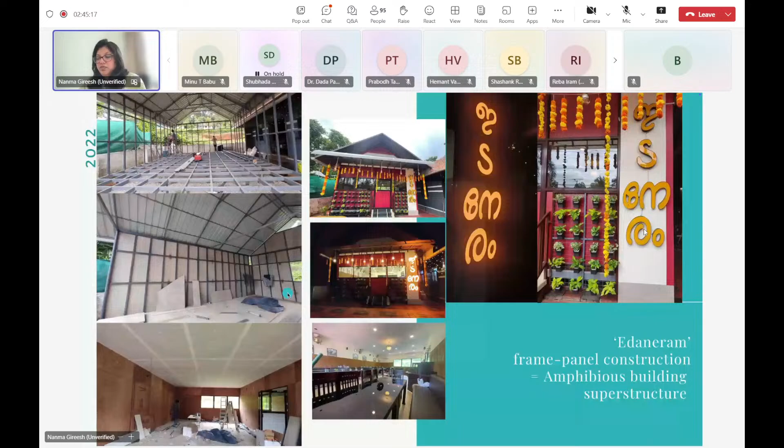This is a restaurant building that I did in my hometown, Kottayam, in Kerala. This is the interior view once it's done. There's not much change, but you can understand how lightweight it is compared to an actual brick house. So that will be the top of an amphibious house, and that's how it will float. The bottom portion, the buoyant foundation, will be the structure that helps us to float.

This is part of ICAADE, International Conference on Amphibious Architecture. In 2019, when I first visited, I was just trying to learn about it. This was just after we founded Nestabide officially, and we didn't know anything. But in 2023, we could present the prototype itself and the project that we received. It was very well welcomed by the team, and they were all happy to see something happening in India.

We were presenting the idea, and the next ICAADE conference is going to be held in Kerala. It's now postponed from November due to personal reasons, but I'm still looking forward to hosting it in Kerala, where international people into amphibious architecture and engineering can see this prototype and experiment on it.

Tomorrow is the anniversary of Amphi Nest. We inaugurated it on September 4th, 2021. This time when I came to India in April to visit my parents, we checked it again to see whether it's still floating. It is absolutely floating, no issues. It has a bit of dirt outside and isn't very aesthetically appealing right now because of the monsoon, but it is still working, and I'm very proud to say that.

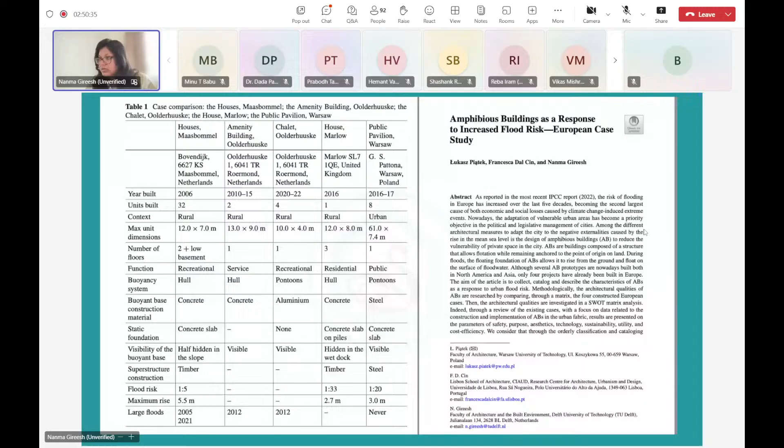All these buildings are for recreational purposes, not permanent residential buildings - that's something I'm very much looking into. This is one of the conference papers we did, where we identified houses at Maasbommel - 32 houses - and there are 2 amenity buildings at Oolderhuuske, which I'll show next. Interestingly, there are different types of amphibious buildings within this same place, which was another intriguing fact.

This is very recent - we went to this place in June with Elizabeth.

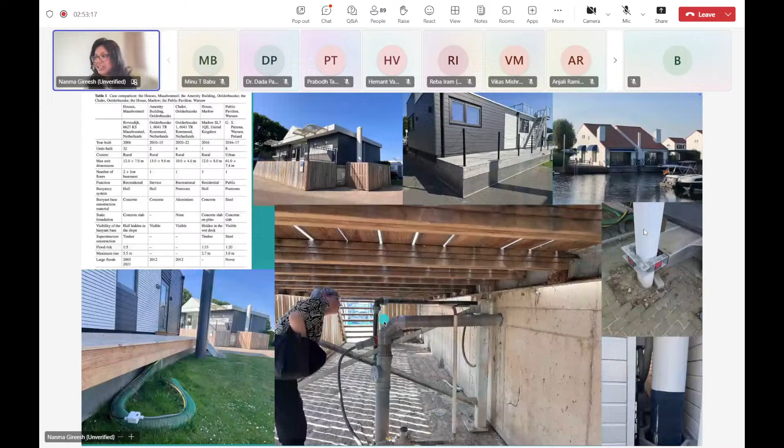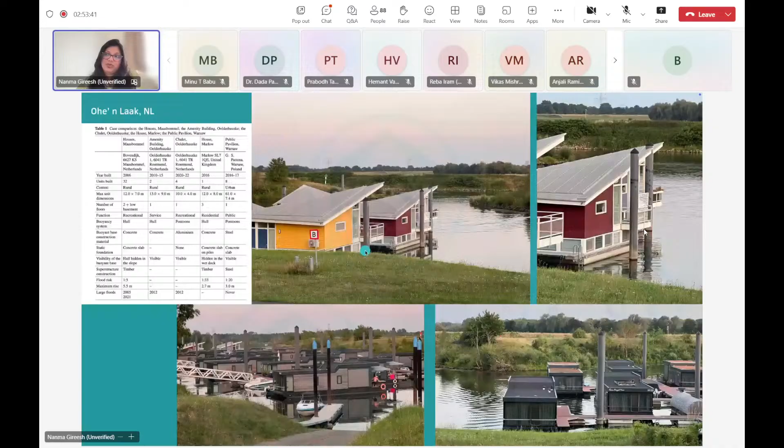Very intriguing. Another one is in Ohe' n Laak, also in the Netherlands. We found some other amphibious buildings, but there are also floating buildings there, and a few amphibious projects, because when the water recedes - this was when water was there - these stay on land most of the time. So these are also amphibious houses, and the definition itself is a bit different.

And this is a part of my PhD topic: nexus of legally afloat urbanism, where I'm trying to think about adaptation to climate change, where coastline acts as a connector rather than a border - the living with water principle.

This is the basic principle of delta urbanism, amphibious buildings and permanent floating buildings. Again, the difference between an amphibious building and a raised building is very significant. A raised building, or statically elevated building, stands on poles and will not float. Those buildings are static and won't be dynamic - the design is entirely different.

And as you just heard, there is a raft foundation, and a buoyant foundation behaves a bit like a raft foundation itself. So you can see there are amphibious and floating types.

So basically, my question is how are these defined? What are these for policymakers and decision makers, in terms of legal and policy support? How are they identified - as houseboats, ships, or distinguishable structures?

The main 3 points from a practitioner's point of view are: governments not recognizing the technology, the standards and codification, and the insurance schemes, which also rely on legal and policy regulations. These are the main constraints, also mentioned by Elizabeth, that restrict the development of amphibious and floating technology itself.

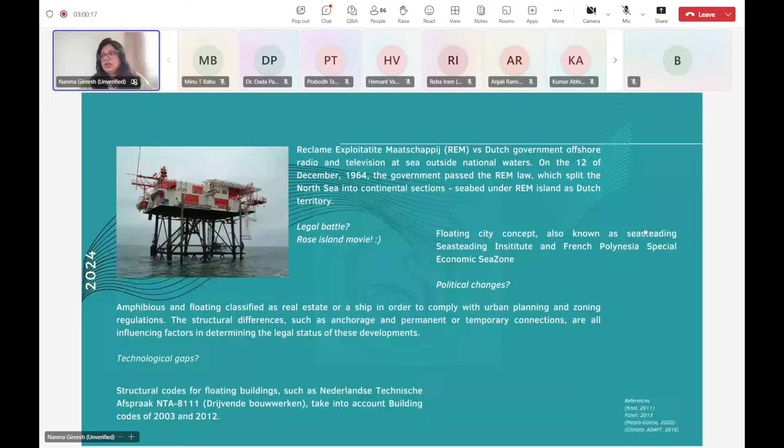And so these questions remain: where to draw the line between amphibious and floating. There are also different floating types—floating buildings in lakes, temporary flat paddy fields maybe, but also offshore floating and near-shore floating. So different types of floating are there—floating buildings and floating cities can be there.

So should amphibious be defined separately, and why? Personally, what I believe is that if we define amphibious separately and try to reduce regulations—it's a bit more complicated if you think about an individual floating building, but floating is much more complicated in terms of scale. If you're going for an offshore building, it's a different calculation, something more different than amphibious. So amphibious can be closer to deltas, while a floating city could be offshore—it's different extremes. So these questions are still there.

So that's what I'm trying to learn and research through my topic. These are some tactics, but I'll leave it there—maybe I'll just quietly stop. I think we still have time.

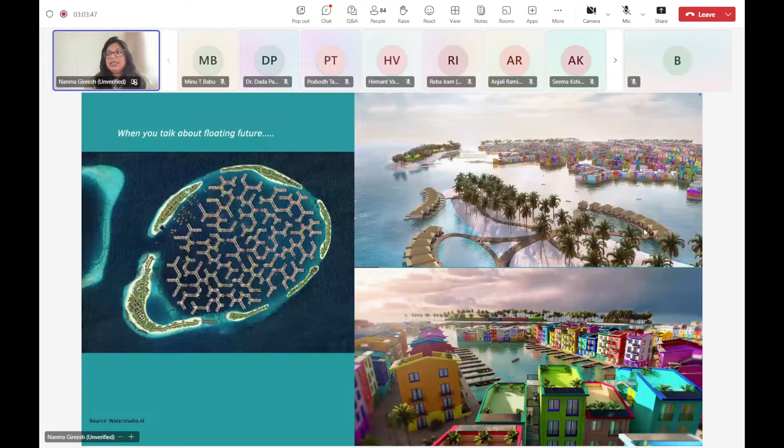As you can see here, it gives a coral reef perspective of how the design works, and you can see the different types of buildings that can come up. It's a floating city called Maldives Floating City. And as you can see, it's not utopian - this is already the first prototype actually happening right now in Maldives.

They are also looking for upscaling, but there are umpteen challenges like regulations and ownership. These projects are all going on around the world. So this is what we are talking about - it's not utopian. When we first mention floating cities, it sounds like something for the far future, but it's not far future, it is already here. The floating future is already here.

For the last slide, we are also part of this Floating Future Consortium. Nestabite is one of the humble international stakeholders, the only stakeholder from India actually. As you can see, it's a very big consortium with many stakeholders, led by TU Delft, Marin, Deltares, Blue Revolution, Blue21 Foundation. Waterstudio is also part of this. You can see many Netherlands organizations and international organizations, and CFIA, so many organizations here.

So this team is working towards a floating future. There are PhDs and postdocs actually working on it right now, which aims to provide the next step in the transition from fighting against the water to living with the water. So that's us - this is me and our Nestabite partner, Ben K. George. This is something about us.